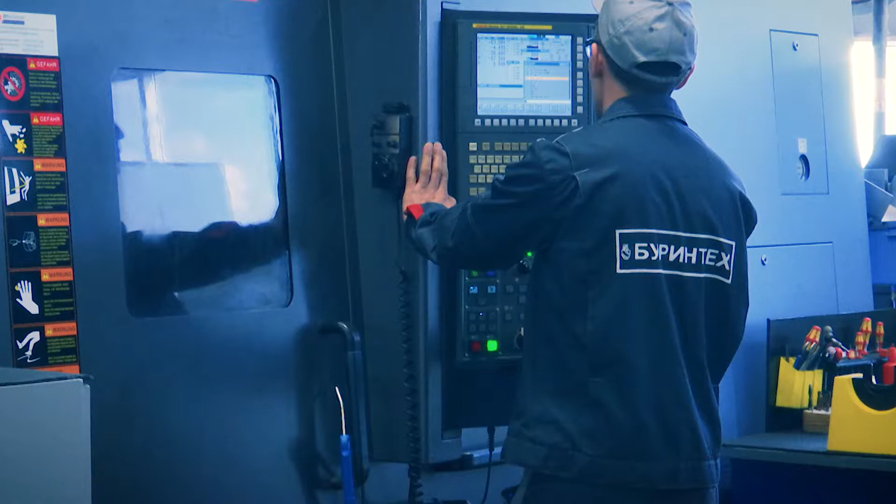Young scientists and engineers started creating and producing a cutting, shearing, drilling bit, which was not produced in Russia at that time, and they set themselves an incredibly ambitious goal to bring its performance to the level of the best world standards. At that time, no one had yet imagined that in a few years they would learn about BURINTEKH all over the world.

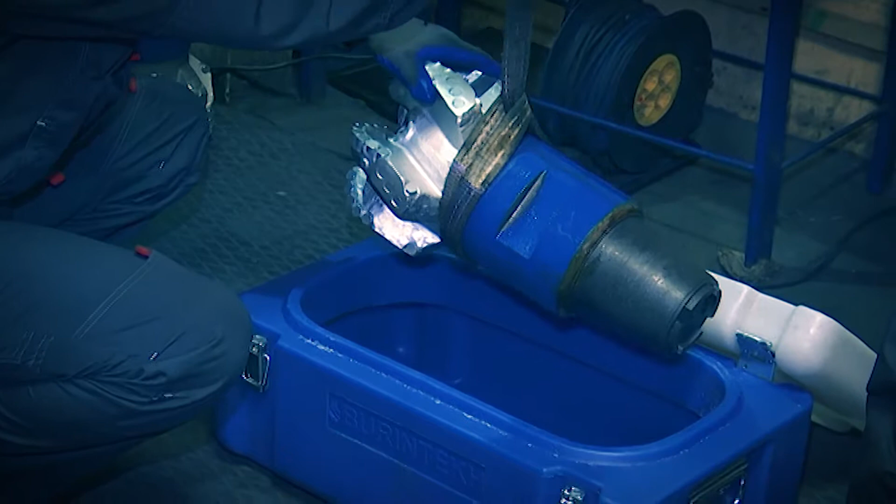The only workshop at that time was located in the city center, in the abandoned production facilities of Motion Picture Studio Bashkortostan. Bits were produced in small batches and sent to field trials. Based on the obtained data, a new generation tool was created here, which allowed for obtaining high results.

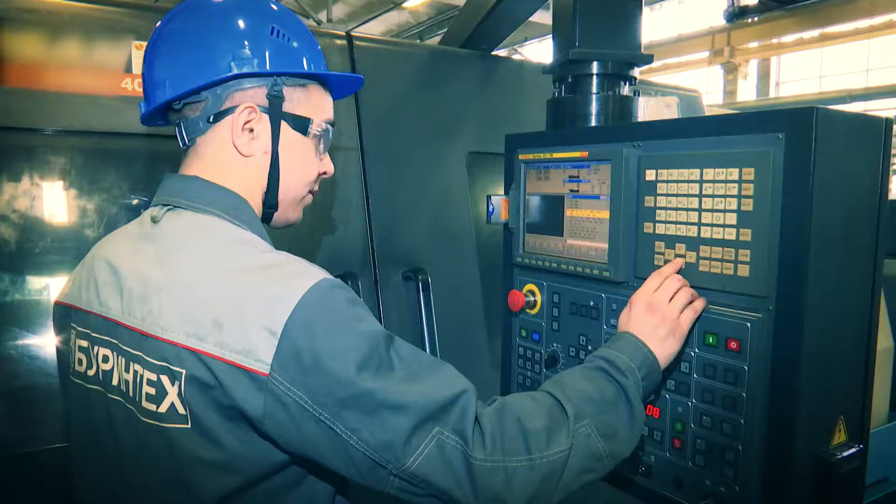Competitive steerable PDC bits have appeared. The transition to its widespread use at many drilling enterprises in Russia marked the beginning of technical re-equipment in the country. And for many years, BURINTEKH has been the leader in the development and production of fundamentally new designs and types of tools, rendering a full range of oil field services.

The idea of creating a company was not immediate. We have been moving forward towards this for many years while we were students of the Ufa Petroleum University, then our doctorate, and worked at the Department of Oil and Gas Drilling under the guidance of such great scientists as Spivak, Mavlyutov, Popov, Alexeyev. We dealt with destruction of rocks.

The idea was to create a bit that can drill a well or well section in one run. It was a driller's dream, and we, a group of young scientists, were also excited by this idea. And in 1999, we established the company exactly for pursuing this dream.

Since the foundation of the company, we felt good support from the Republic of Bashkortostan government, in the person of the first president of our republic, Murtaza Rahimov, and of course the head of our university, Alexander Spivak, then Aidar Shammazov, also Bakhtizin, our scientific supervisors Midhat Mavlyutov, Alexeyev, and of course there was great support from the production side.

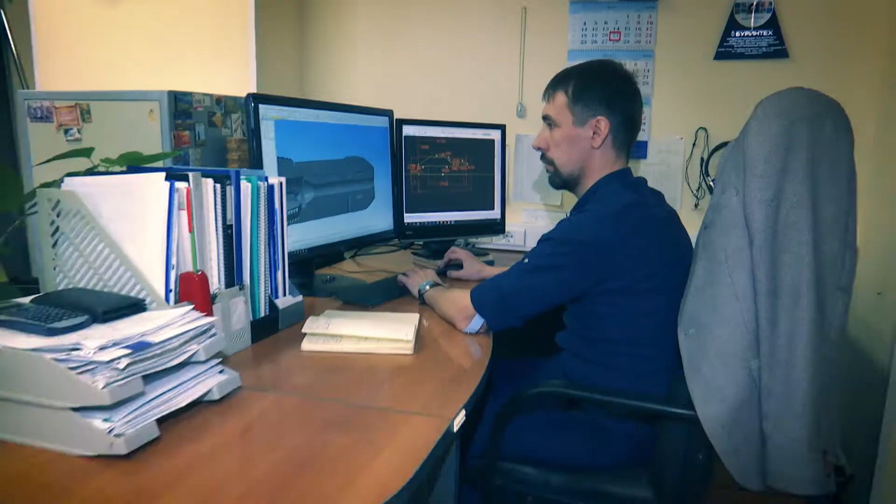BURINTEKH, having initially substantial scientific potential and virtually no production potential, has been developed by means of innovations. This approach allowed the company not only to confidently strengthen its position in the market, actually doubling the volume of production annually, but also changed the attitude of Russian drilling companies to the drilling process as a whole.

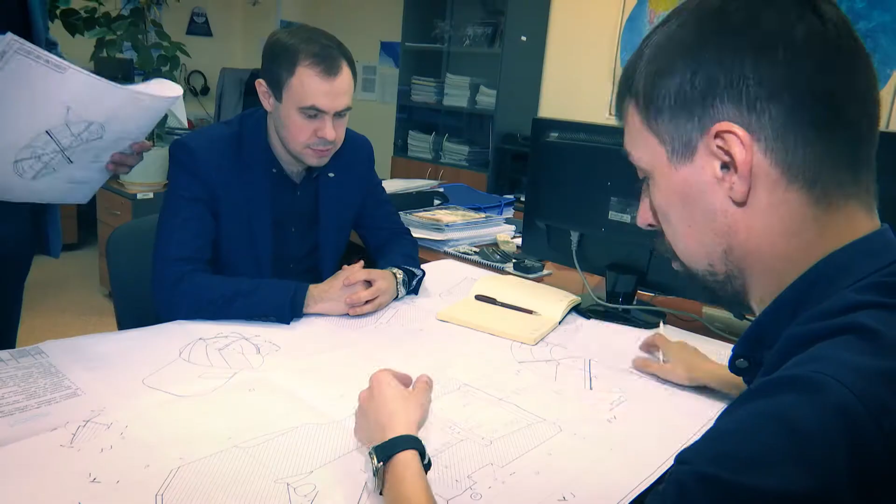The Drilling Tool Development Center is a unique division of BURINTEKH, where innovations are born. Solid research work allows creating new high-tech products and improving previously manufactured products. Employees of the center were able to find many unique solutions that today have no analogs in world practice.

The Development Center is the division that develops new technology, provides basically its entire life cycle, and ensures the competitiveness of products. Within 20 years, we rose from scratch. In practice, with diamond bits, we now probably cover 95% of the market.

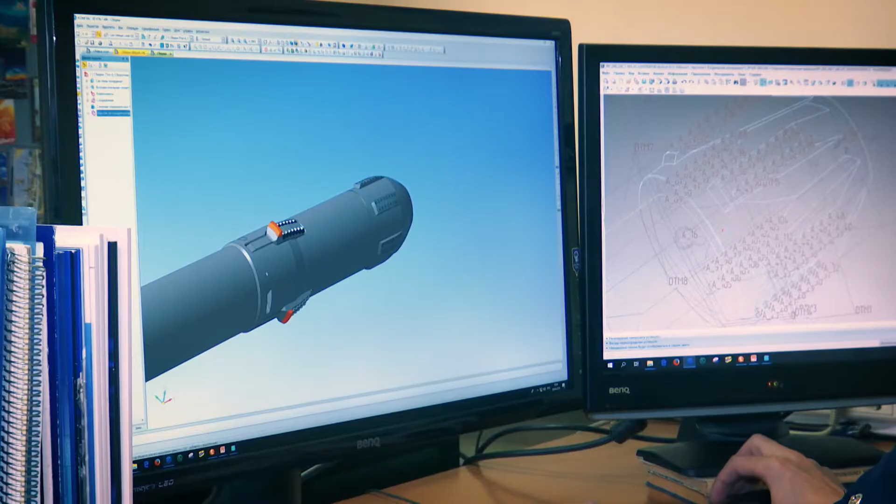This tool is very unique for a specific region, and even for a specific customer in their region will have its own tool. Any development is created for the specific tasks of a particular customer, emphasized at the enterprise.

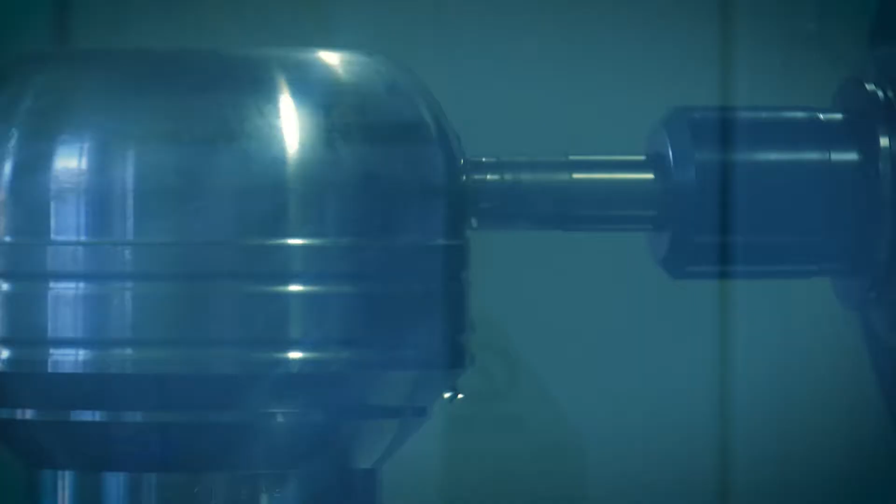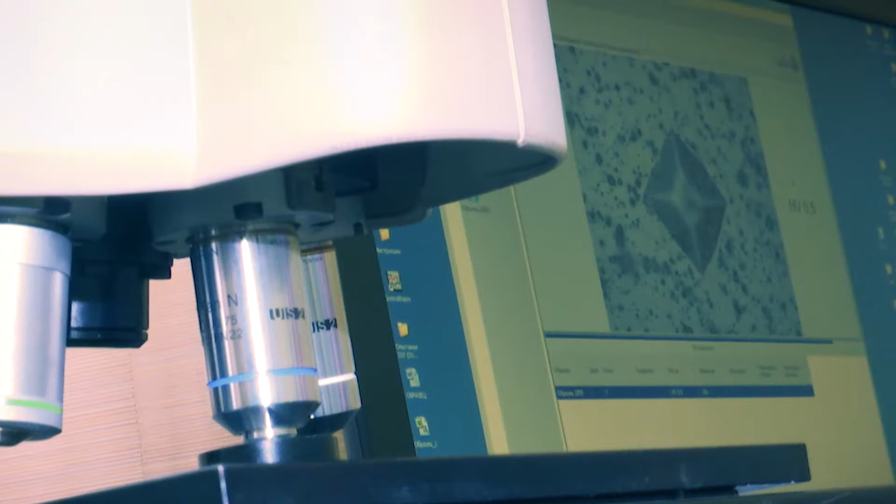This allows oil and gas companies to increase their technical and economic indicators in the shortest possible time, performing complex tasks while drilling wells for various purposes. Investments in science and close cooperation with customers are one of the main conditions for the development of the enterprise, they are confident at BURINTEKH.

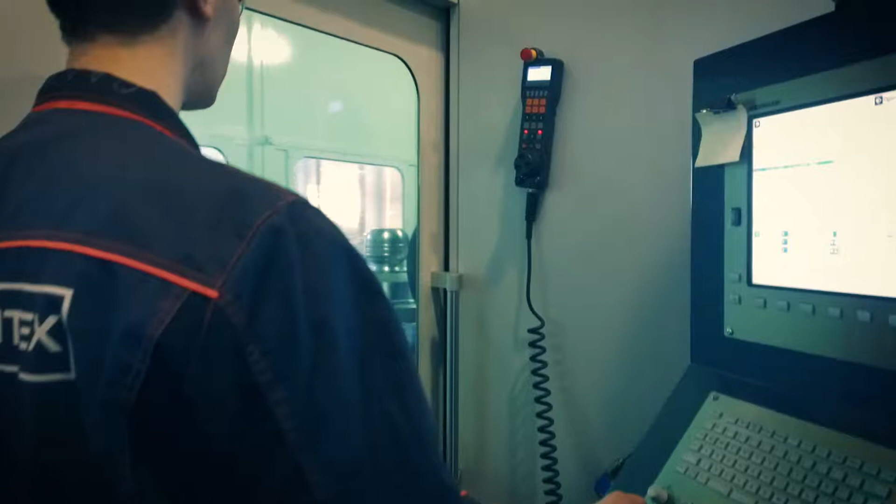BURINTEKH is Russia's largest manufacturing enterprise, furnished with state-of-the-art equipment, the latest metalworking equipment, high-precision CNC machines, and multi-axis machining centers. Many of them are unique products themselves, often unparalleled anywhere in the world. Today, BURINTEKH manufactures hundreds of products in demand.

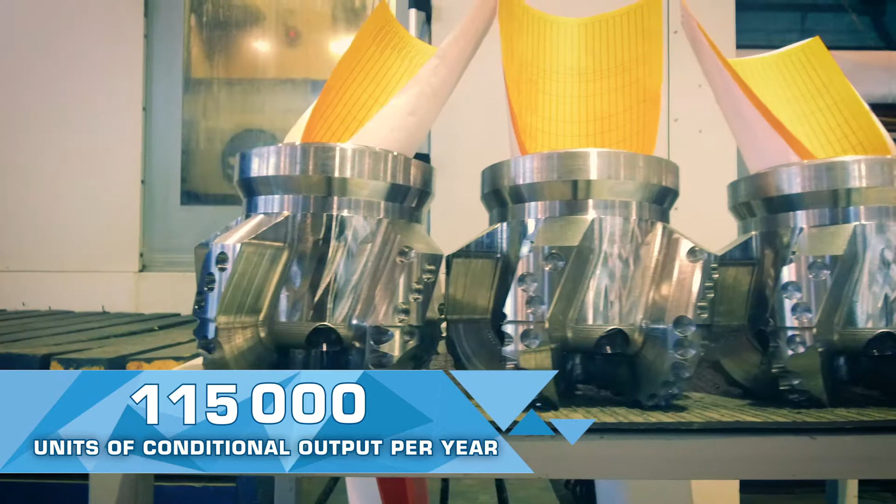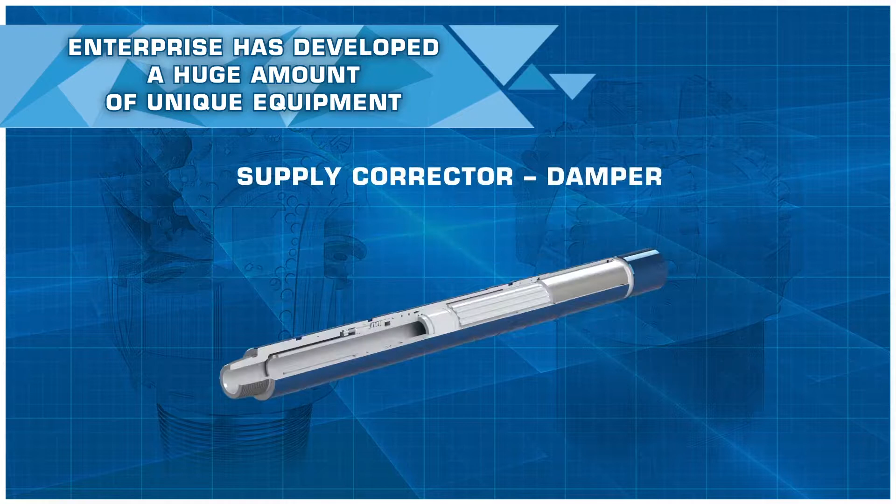PDC steel and matrix bits, roller cone bits, core bits, core barrels, reamers, special bits, milling tools for workover, casing exit systems, jars, BHA elements, casing mounting, chemicals to increase the rate of penetration, and cement slurries.

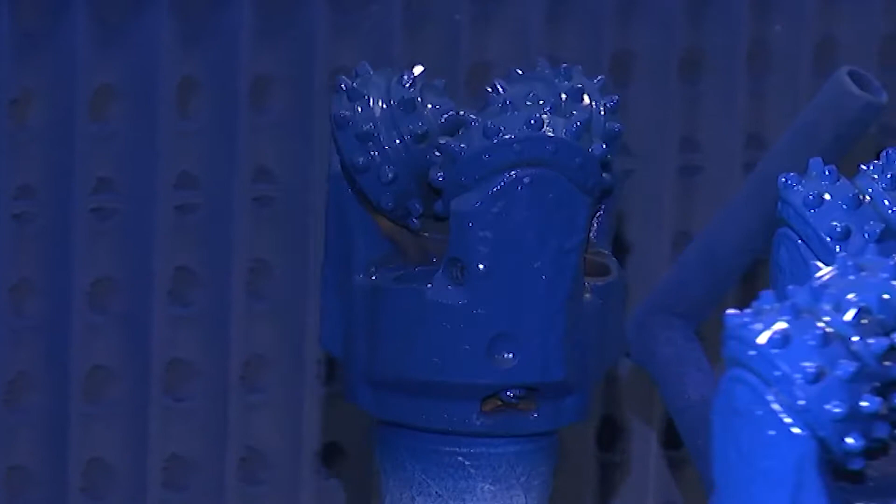Every year we produce tens of thousands of production units that are in demand, not only in our country, but also abroad. A production unit can be considered not only one part, but also an assembly unit which includes up to 250 parts. Most importantly, it's a pleasure to work with the latest modern equipment and cutting tools.

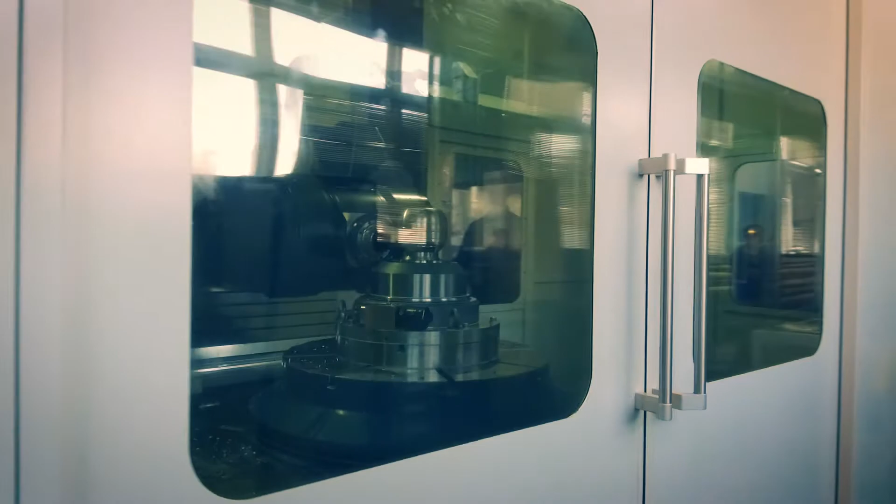And accordingly, every year the technology improves. Something new appears, new processing methods. Like the robot, we will introduce it. Very interesting, why not?

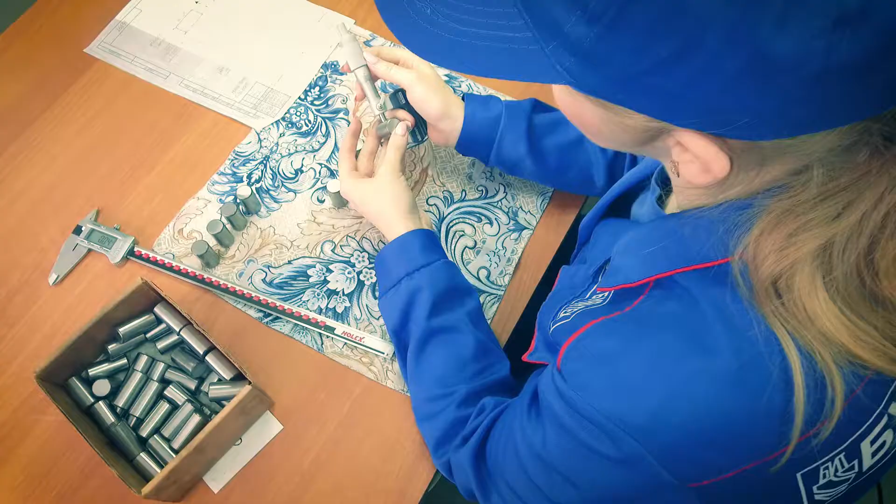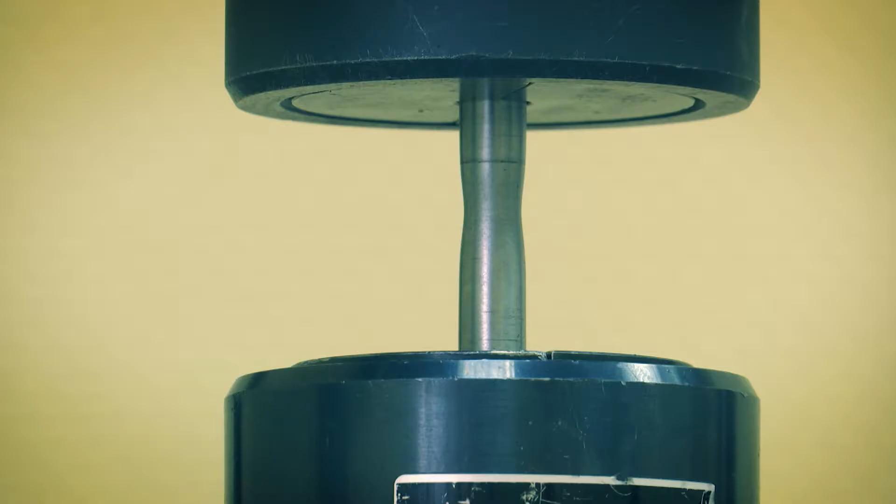For BURINTEKH, quality is a priority. Strict control is carried out at every stage of production, from raw materials to finished products. For this, a special service has been created at the enterprise.

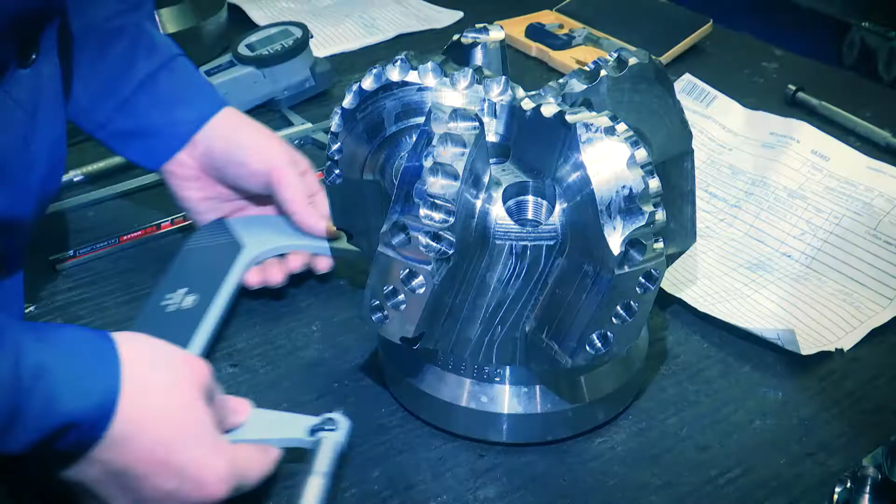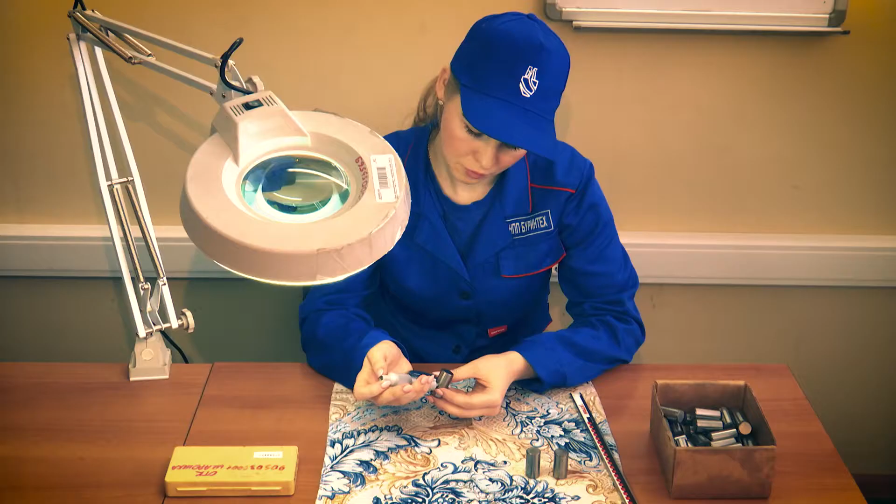A lot of attention was always paid to the quality of products. Since 2003, the company has had an integrated quality management system confirmed by international standards ISO 9001 and API 7. We have stages of product quality control from the very beginning: when designing, the designer designs, then controls, then incoming control of materials and semi-finished products. Everything that is included in the product is subject to control.

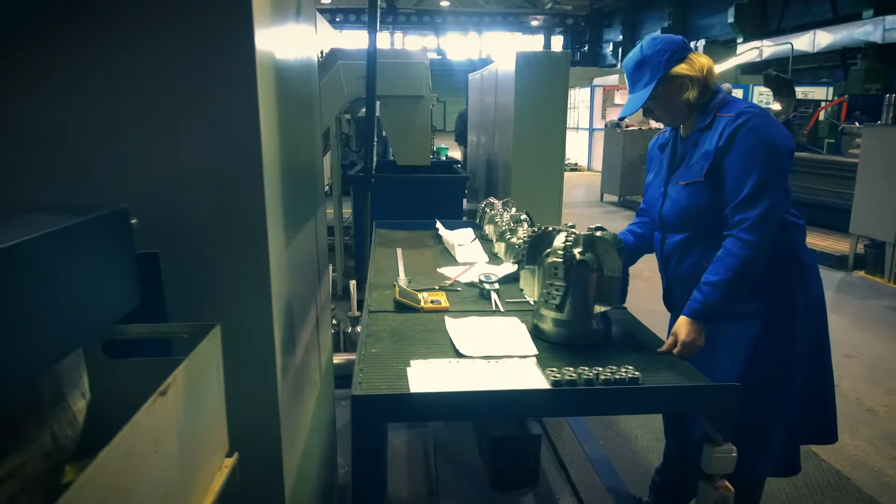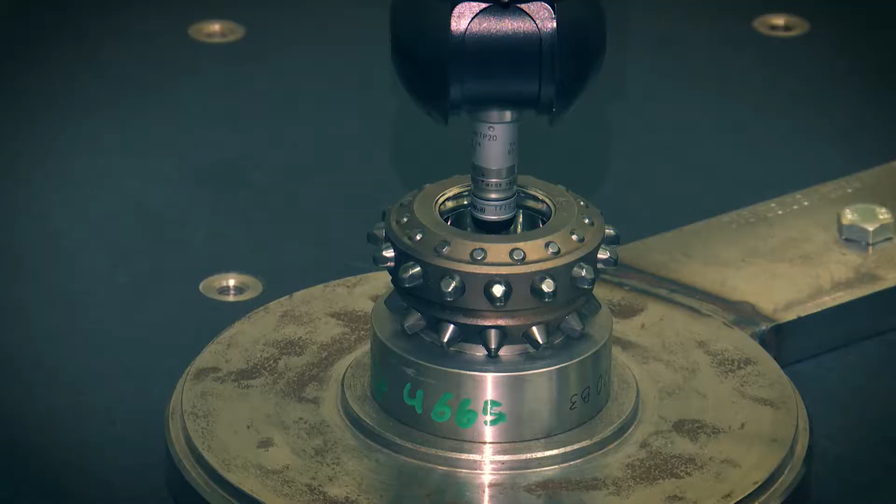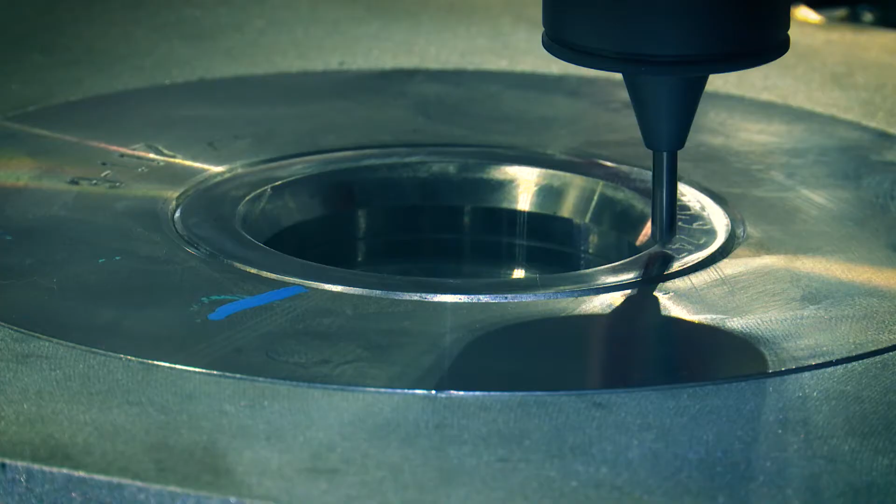During production, we have quality control at each stage according to the technological process. Either an employee controls it himself, or at control points established by the process engineering service, where the technical control department is involved. In this way, we get world-class products and have the opportunity to enter global markets, which is confirmed by the fact that we deliver what the customer wants, on time.

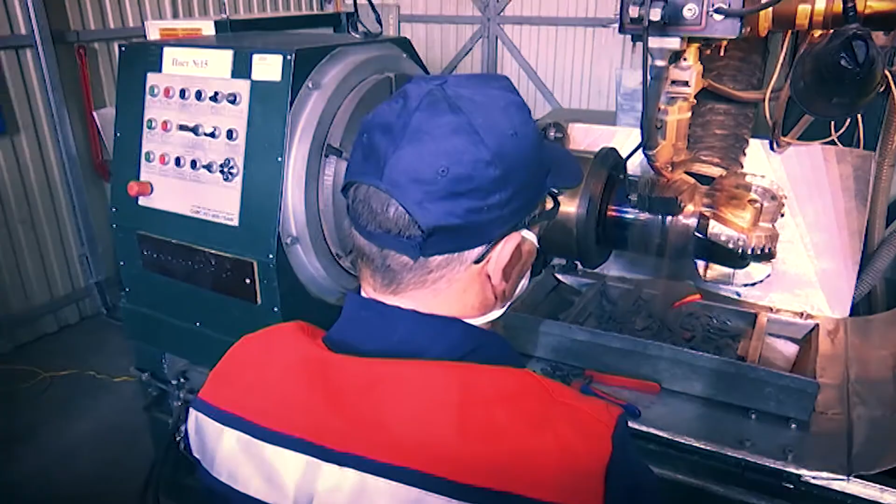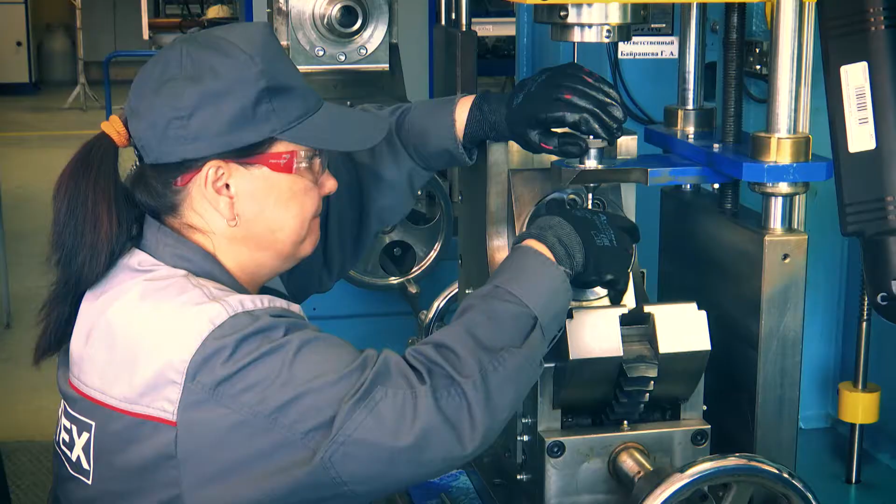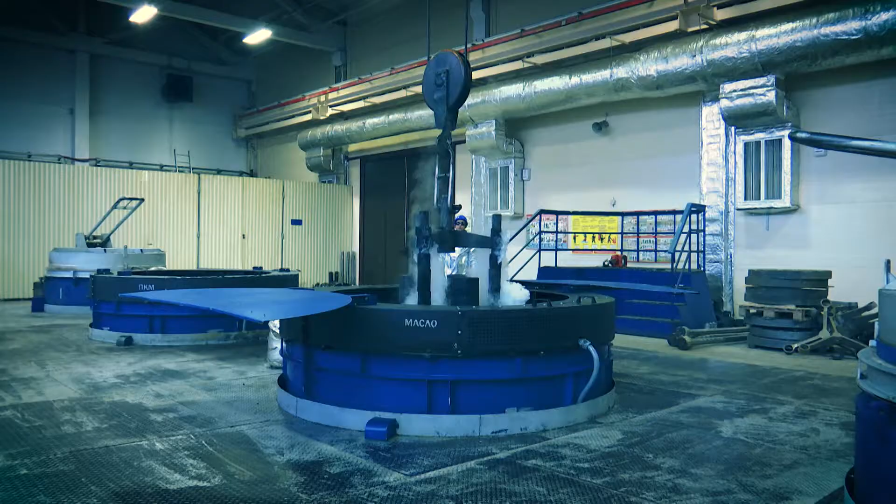Health, safety, and environment are no empty boast at BURINTEKH. All employees strictly comply with these requirements and are personally responsible for their duties. The principle of energy saving, rational natural resource utilization, and safe waste storage practically reduce environmental damage to zero. Introduction of the best existing technologies in labor protection and regular on-site production control has reduced the possible risks of industrial accidents and occupational diseases.

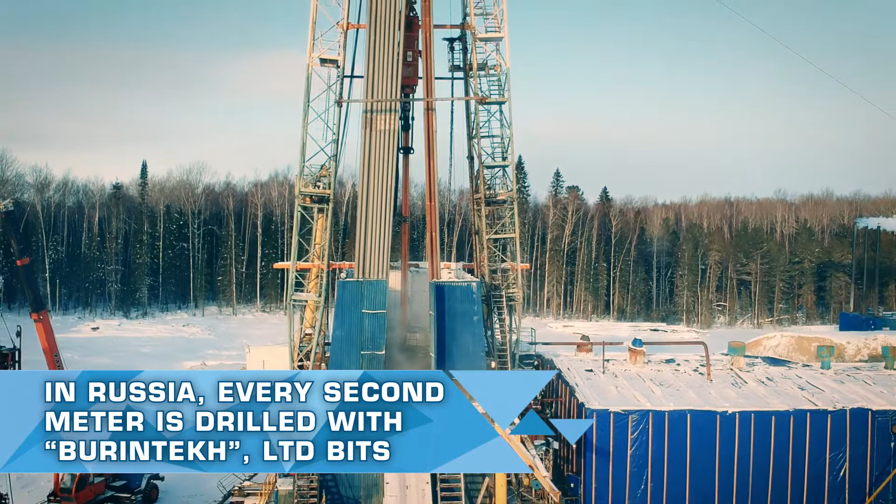BURINTEKH is currently one of the largest and highly professional oilfield service companies in the country. Our service includes all the main types, from bit service, coring, and MWD support, to casing exits and service of drilling and process fluids.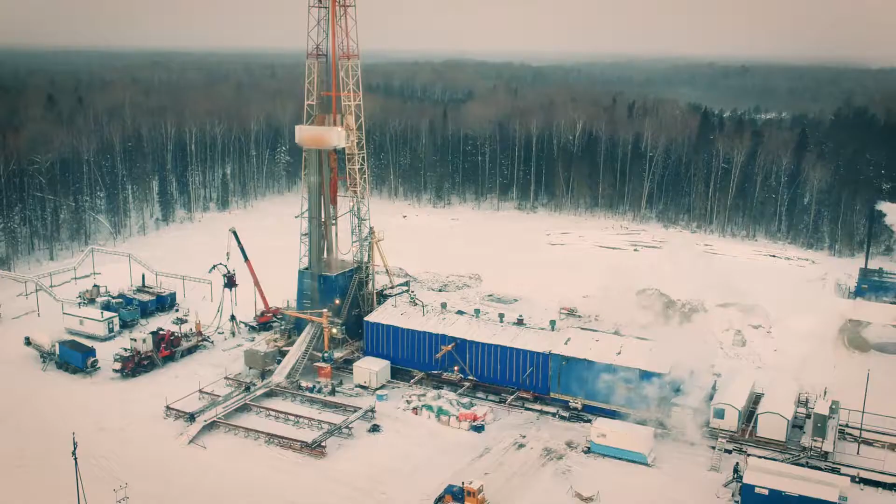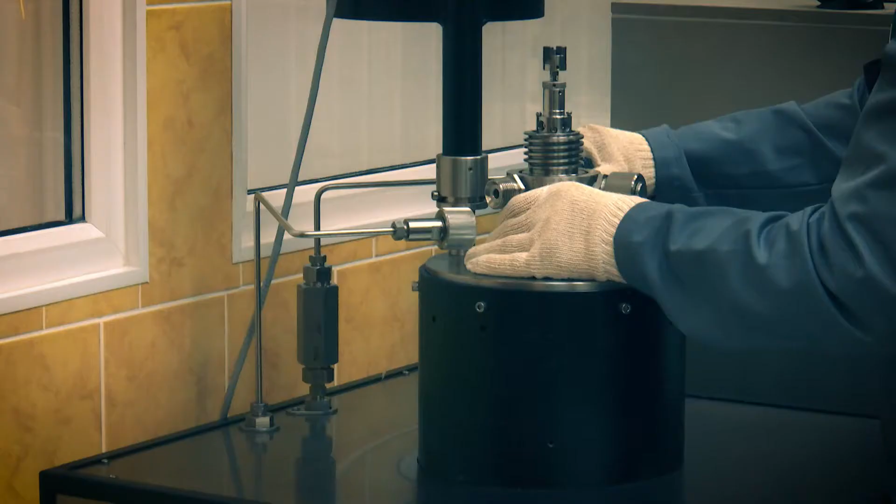Integrated engineering and technological support allows customers to quickly, efficiently, with minimal costs and risks, drill wells of any complexity. A powerful research base, own laboratories, unique patented technologies and formulations, high-quality products meeting all international standards, and faultless provision of services have earned the trust of consumers around the world.

Today, BURINTEKH cooperates with leading Russian and foreign oil and gas companies. Tools for drilling and workover are successfully supplied to CIS countries, the Middle East, South and North America, Europe, and North Africa. The success of the company is confirmed by numerous diplomas and awards in quality, service, and highly effective management.

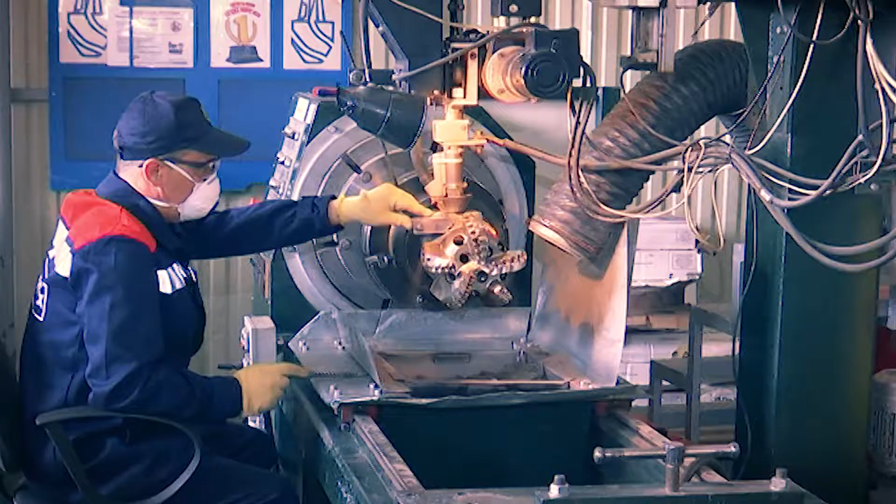The main achievement of the enterprise is its professional, united team. The BURINTEKH team is a team of active, motivated, successful people constantly developing and open to everything new. Today the company employs more than 2,000 people. The team is young, with an average age of 36 years. Here, they not only know how to work, but also actively relax.

We have several programs. As regards health, we have a voluntary health insurance program for each employee. We provide free hot meals in Ufa and Nefteyugansk, arrange rotational transportation for employees to and from work, not only in Ufa but even in Blagoveshchensk. Today we have rotational transport with 28 routes. This is a lot, but we create convenience for our employees.

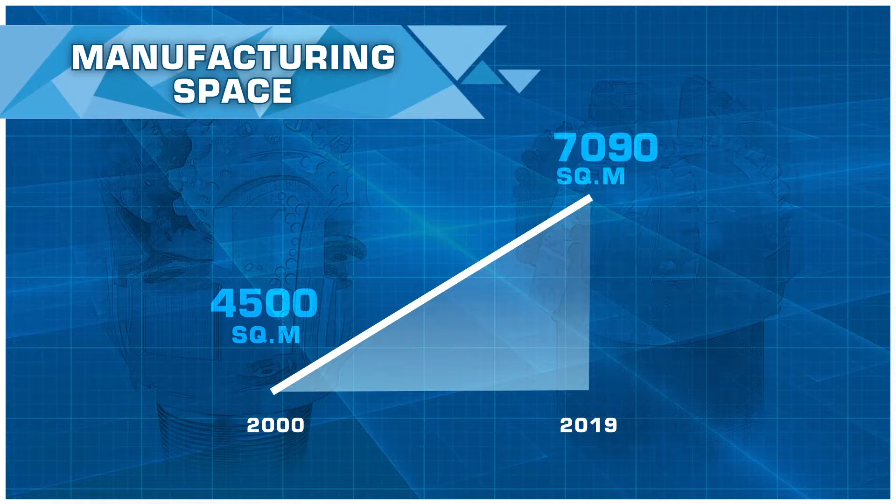Our enterprise was created from scratch, but over these 20 years our company is now undoubtedly positioned as a leader in the field of oil services and production of tools for drilling and workover, not only in Russia but also abroad. We are perceived as a leading engineering oilfield service company.

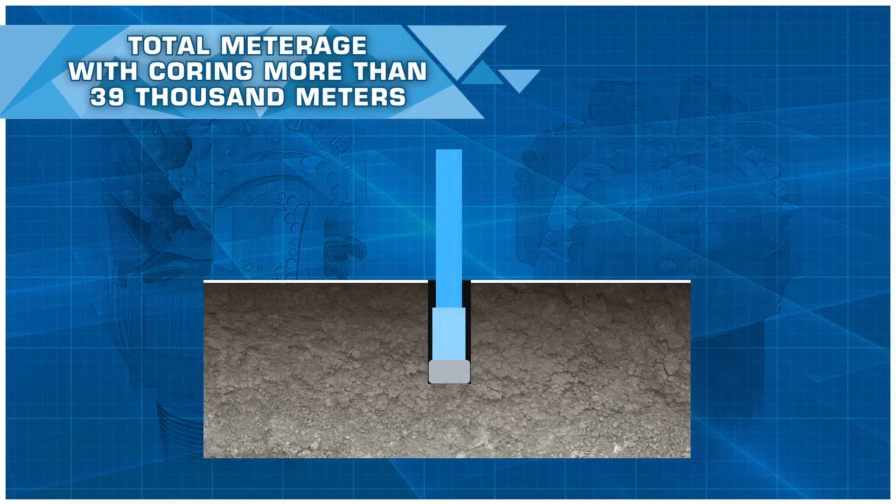One of the great achievements of our company, in my opinion, is that thanks to our developments, we have to some extent radically changed drilling technologies in the Russian Federation and rates of penetration. Practically the majority in Russia has switched to cutting, shearing drilling bits of a cutting type. It may be said that a driller's dream to drill one well with one bit has come true. There is another latest achievement: the creation of rotary steerable systems that will allow drilling very complex horizontal wells.

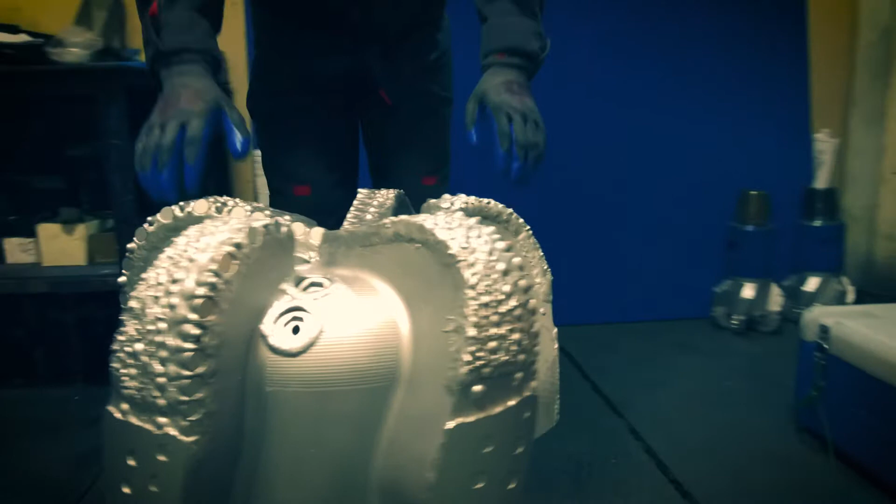BURINTEKH gained traction thanks to innovations, well-coordinated teamwork, a clear quality management system, and instant response to customer requirements. The dream of the company founders has come true. Leading bits and world-class tools were developed and implemented, and here they are rightfully proud of their products. The company managed to achieve maximum efficiency at each stage of production and become the industry leader. BURINTEKH feels confident about the future.

What's up? Do you need a ride? Yeah, it would be nice. Oh, it's you! Haven't seen you for ages. Wish you Godspeed. What are you carrying now? Still bits to the rig site? Yeah. Why so little? Less drilling? Drilling increased. But formerly about 10 to 15 bits were used to drill one well, and now several wells are drilled with one bit. Whoa! And how did they do it? These are new bits. BURINTEKH introduced them, and after that, drilling technologies changed greatly.

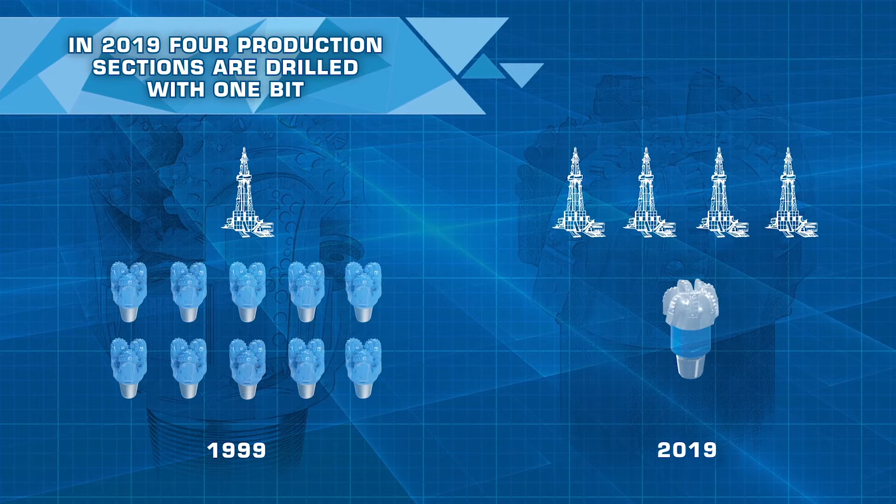In 1999, production casing drilling required about 10 bits. In 2019, thanks to BURINTEKH Ltd developments, up to 4 production sections are drilled with 1 bit.